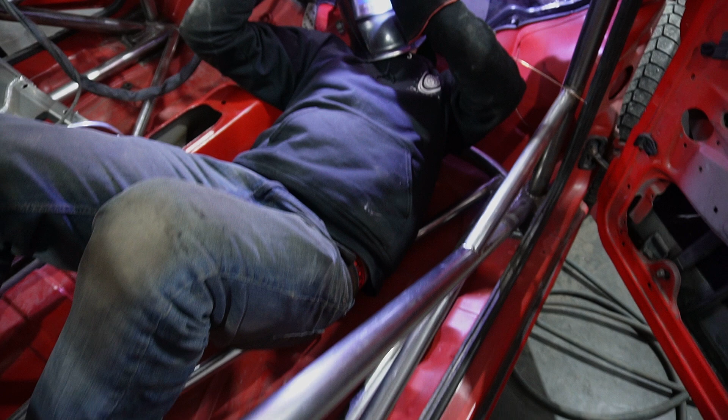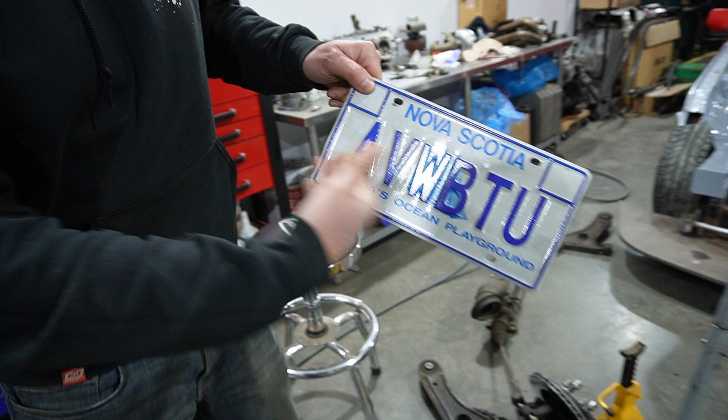Silence, that's it. Guess what that means in the comments? Who knows what that is? I know what it is. You only know because I told you. You would have never guessed that.

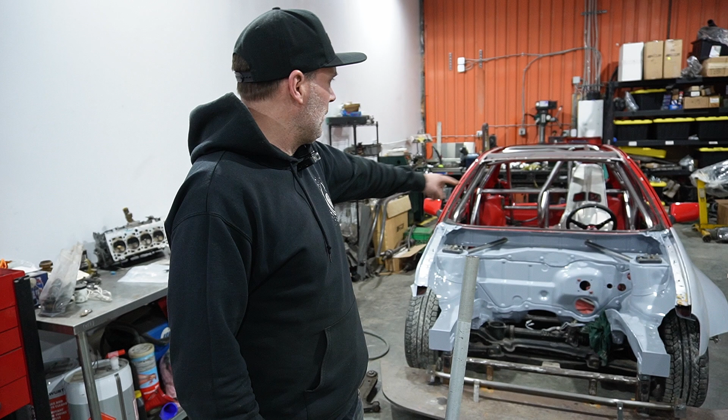Okay, we got the front bars welded in. The steering column's still zip tied up, so we got to build a steering column bracket.

You sticking your gut out? Tissue's in here. Yeah, okay.

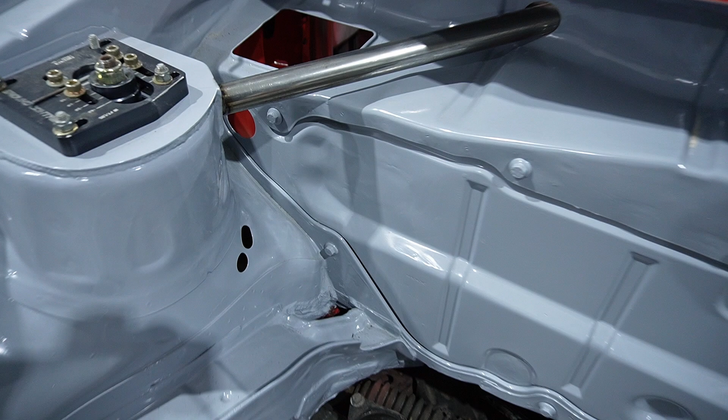So weld those in, looking good. We got those welded in. We got to build a bracket for the steering column, and we're going to just design something up quick and cut it out on the plasma. That's how Fusion works for me, really quick. Then we got to cut that out, bend it all up, get it in the car. We'll show you what we did.

Okay, before we continue, Clayton, we wanted to talk about... jazz hands. We wanted to talk about what? The hoopty. It's coming back. It's going to be amazing. Well, I wouldn't say it's coming back. No, it's coming back. It might come back, actually.

We're finally going to do the teardown of that. We're going to have an upcoming video probably within the next couple of weeks, I'd say. Your way this weekend, right? Yep. But we're going to bring it in, pull the engine out, get it all ready to do the engine teardown, and I think we're going to do the live stream as we talked about before for the engine teardown.

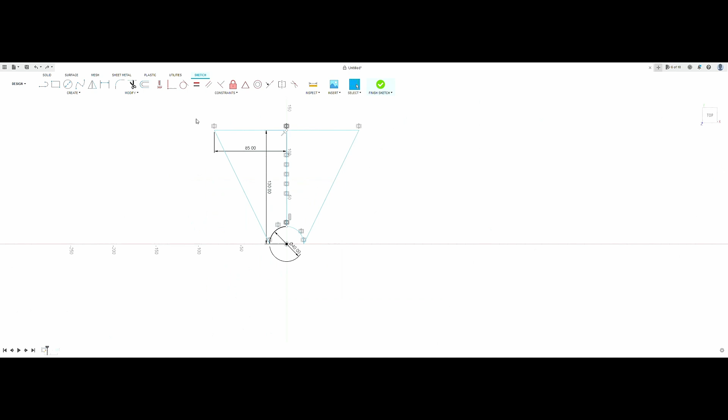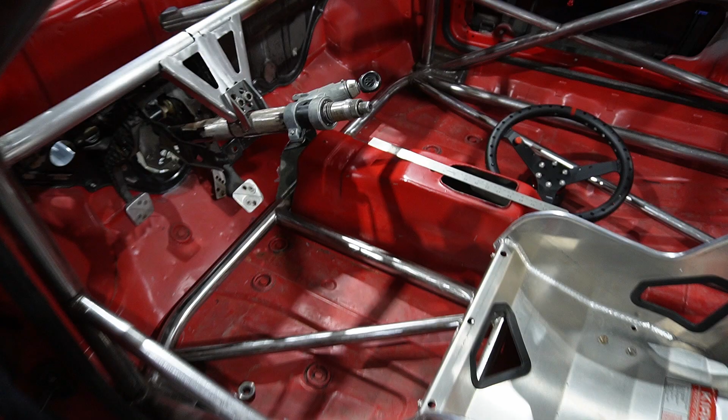Okay, we got the bracket all cut out, ready to weld on. One more thing off the list.

Still primer, Clayton. We still got a long way to go before that's looking fancy. It's not just staying primer? Not staying primer. But we did get the bars welded in, as we mentioned, and the steering column bracket's done.

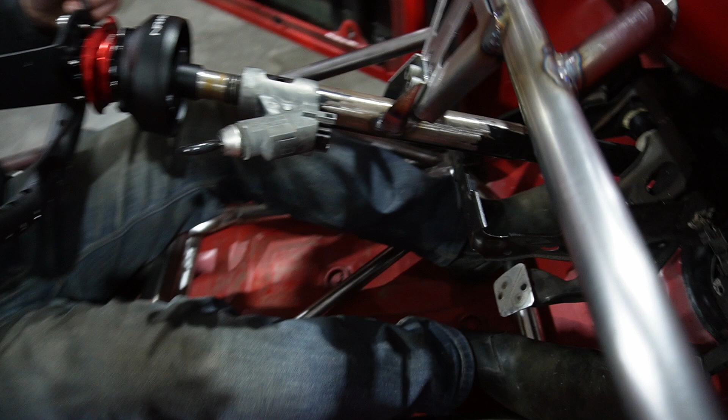I don't know if you can see that from out there, Clayton, but we drew that up, cut it on the plasma cutter. Minor headaches with that one. I think the bending was the worst part of that thing, but it came out pretty good. We got another bracket to build underneath it to give it a little bit more stability, but it's definitely better than what we had last time, especially with...

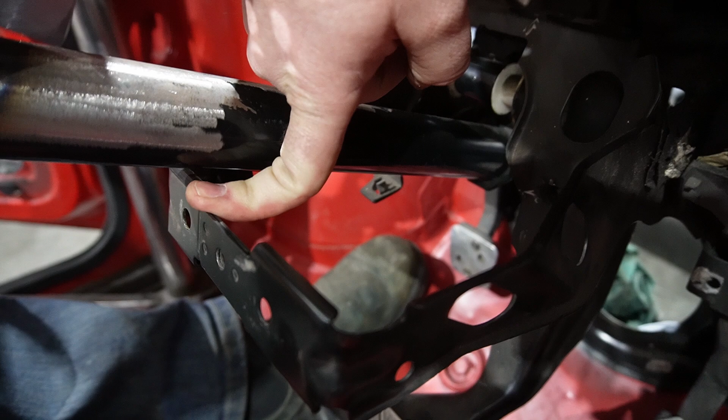Yeah, pretty much, yeah. And I got a new quick release, fancier than the last one that I had on here. Obviously none of it's bolted in yet because this is coming in and out of the car 1,000 times.

So now we got to do the back of the seat bracket. I just want some support on the back side of the seat. So we're going to build a bracket from the seat to the actual roll cage itself. Probably going to cut something out on a plasma cutter again with that.

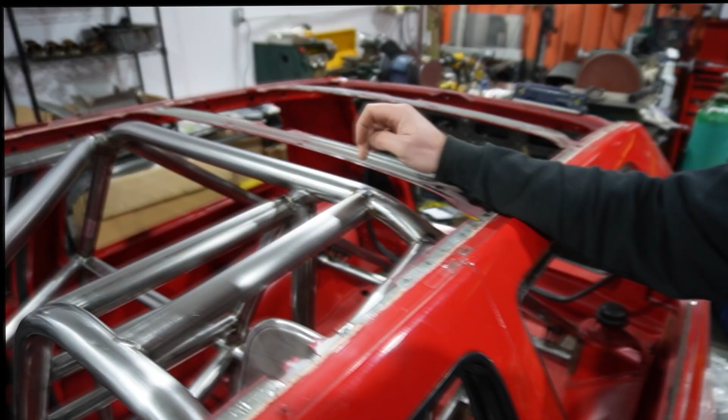So let's do it. There were some holes on the top of the cage that they didn't get to. I don't know if we talked about this or not, but I went around and welded those all up now that we can access them on both sides. So that's all done. Once we get the seat bracket done, the next step will be to paint the cage, which I already talked about. We are going to paint the cage - best time to do it now with everything taken apart.

So let's do the seat bracket, Clayton. Come on.

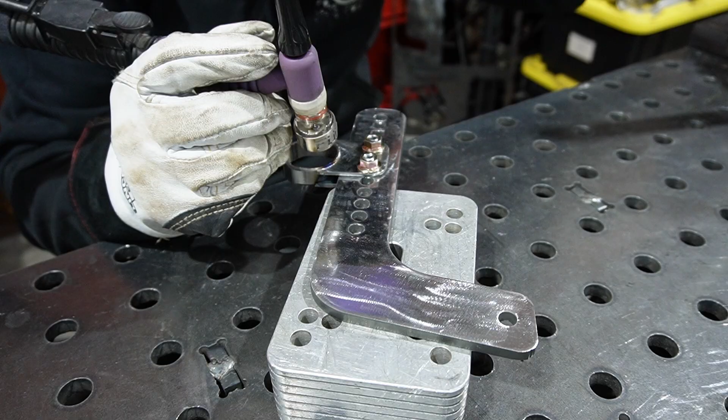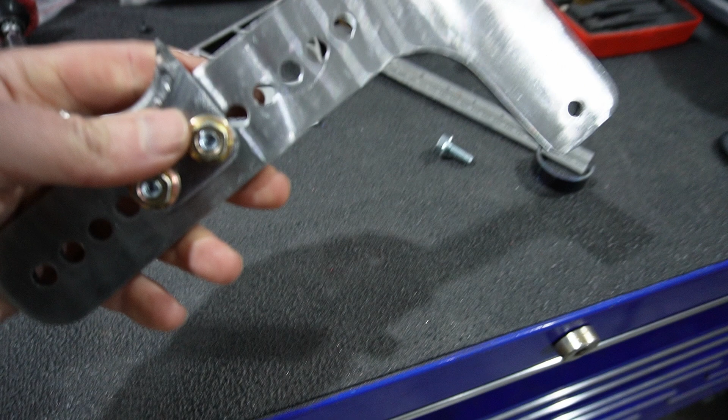Okay, next up, seat bracket. We cut this out and we got to get this tacked in. Clayton, standing around doing nothing.

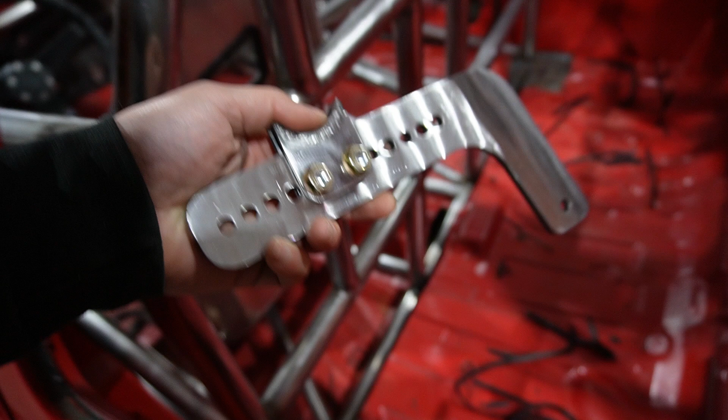Stay warm, yeah. So we're going to put this in here like so. Something like that. I don't know if you can see any of that, but you'll see it when it's all done. You got her?

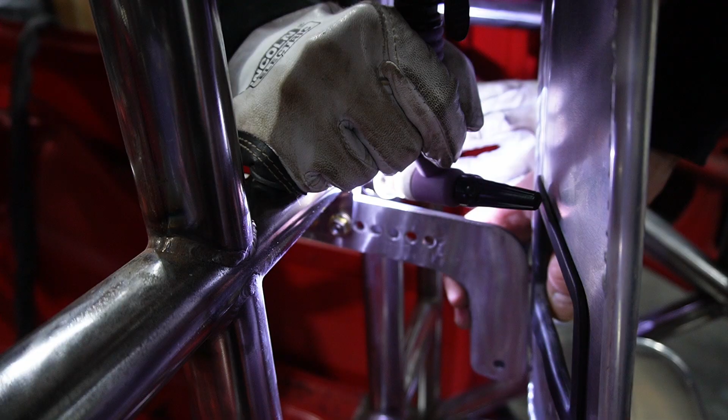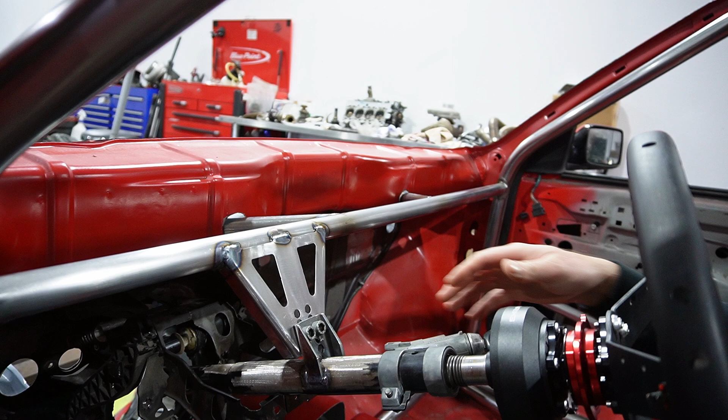Okay, next up is the cluster. I got it taped up just to protect it. I was originally going to mount this in the dash itself, but I think I want to mount it and attach it to the steering column so that if the steering column gets adjusted, it will stay the same all the time. I have a few ideas of how I want to do this. I think I'm going to do like a sheet metal, bend something up, kind of like we did on the bracket here.

I'll probably do it out of aluminum so that it can be removed. And I think I'm just going to design something up in Fusion again and cut it out on the plasma. Hopefully we can make something work.

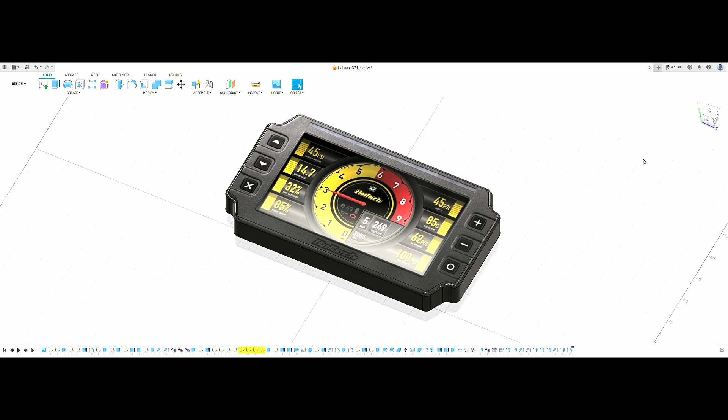All right, so I have Fusion 360 fired up and I was lucky to be able to find a 3D model of the IC-7 Haltech Dash. So this is going to make my life extremely easy because all the mounting points and everything are already here, where the connector goes, everything. So I basically just have to model something around this to fit in the car and also fit around this dash.

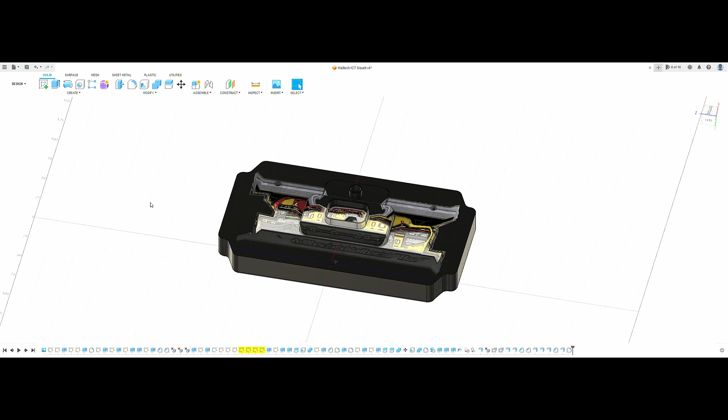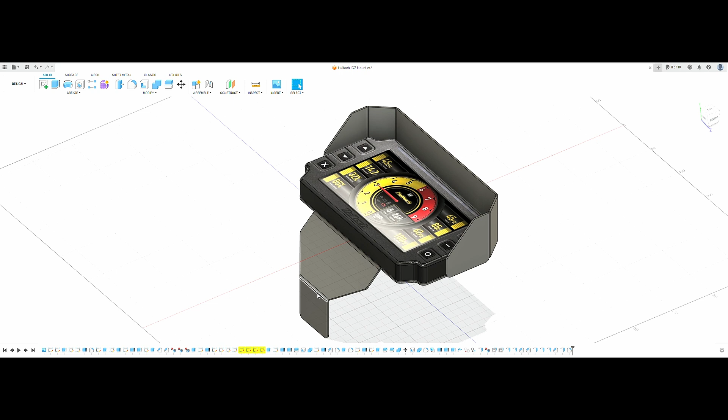So I've actually gone ahead and already done that. Let's put this back to a home position. I've already gone ahead and done that, which I'll show you now. So this gives you a good idea of what it's going to be. These measurements, all this is going to be adjusted once we take final measurements on how it's going to fit in the car. So all this will be changed as we move forward. But I basically gave it a little sunshade so that when it's in the car, it'll have a little bit better visibility. There are LEDs all up along here.

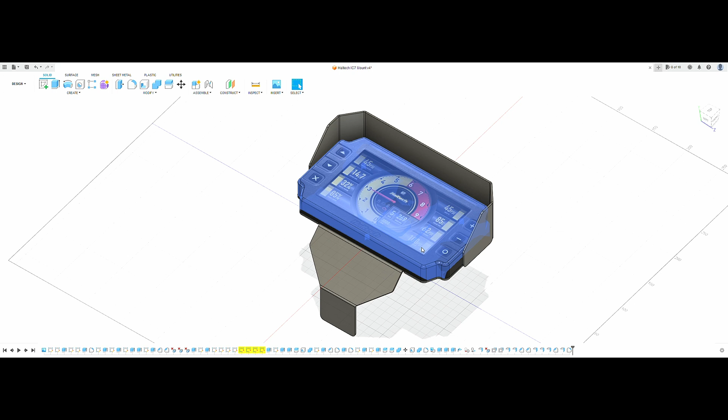Also on the sides, I've cut them a little bit short because these are basically a yes and no kind of push button. Obviously there's other buttons there as well, but typically if you need to enter anything, you're going to press the X or the O on the side. So I want to be able to fit my gloves in there and be able to hit those buttons fairly easily. And then the side angles of how it's all going to mount in, those are going to be adjusted as we take some measurements for it. So that's going to be easy to bend up.

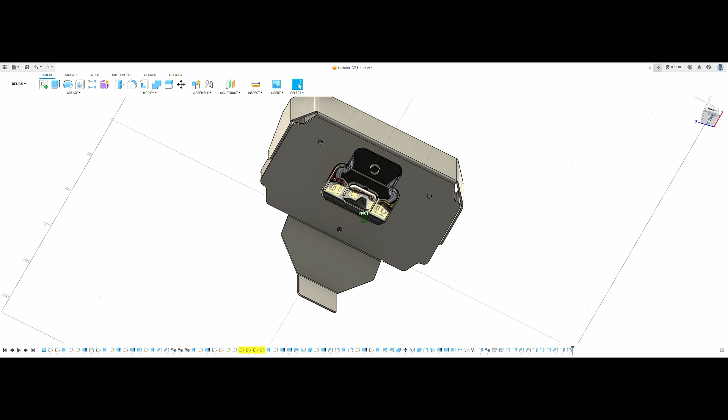And we're ready now to basically get the G-code for this so that the CNC machine can understand it. And we'll cut it out of the plasma and start bending it up. Hopefully all goes as planned with this thing.

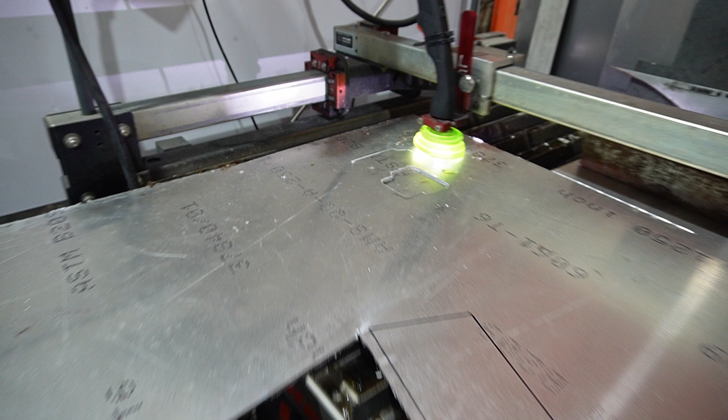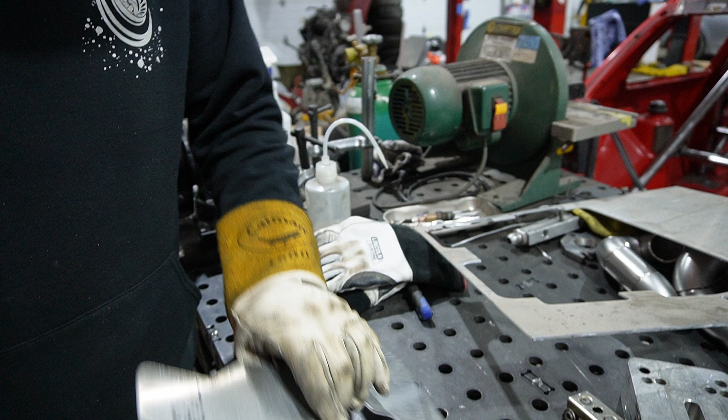She's thick, but it's what we had. So let's see if we can bend it up and make something out of it.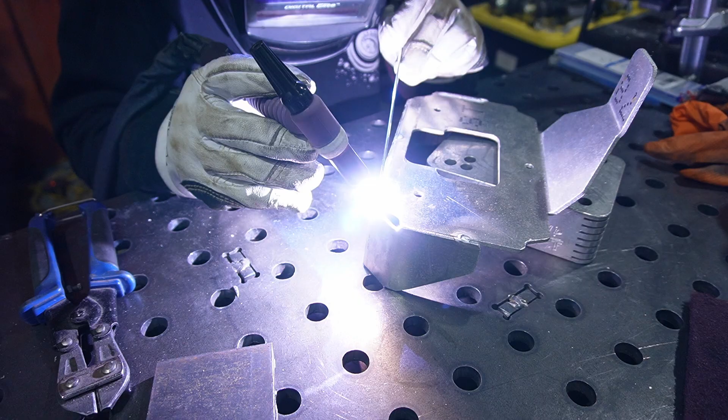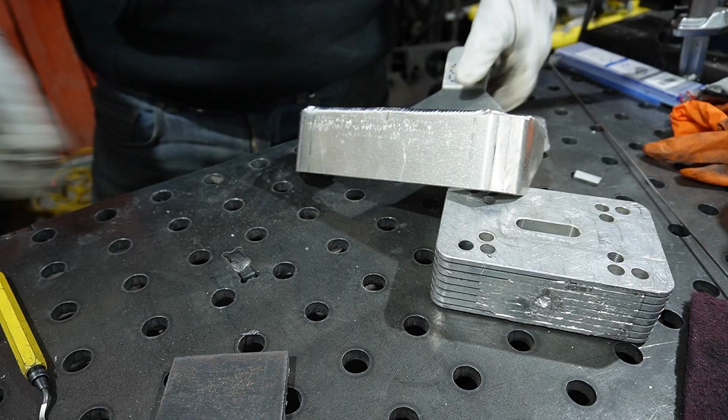Okay, there we have it, tacked up. Probably going to paint it, I think, black, crinkle coat, I don't know, flat black, something, not shiny.

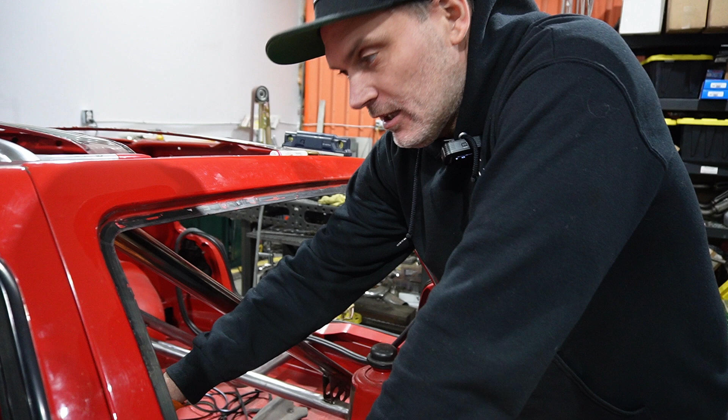Clayton, we got the seat mounted nice and sturdy now. As you can see, we cut that out with plasma. I got this all tacked, welded in now, for good, welded on the back of the seat. Also, I don't think we filmed any of welding that on the seat. No. It is in very nice and solid. It's adjustable, and look at this fancy thing here, Clayton. That's nice. Let me go on the other side.

Well, I got that B-roll all of it. We got that all cut out on the plasma and bent up. We did try to bend it, and this specific grade of aluminum isn't great for bending, so it ended up cracking. Yeah, a little thick too, so. No, I don't mind the thickness now. I've foreseen bending it though. Yeah, for bending it. And anyways, we had to weld the backside of it.

Whatever, we're going to probably just crinkle coat that. Crinkle coat it. It's going to be black anyway, so it's not going to stay silver. So basically the rest of the stuff that needs to be welded to the cage and everything is completed. We're now going to sand it all down, get it ready to paint it, which is going to be a pain because there's going to be a lot of taping and a lot of sanding. The sanding won't go too bad because Robbie's got most cleaned up already. But there was a couple other things we want to talk about, right, Clayton?

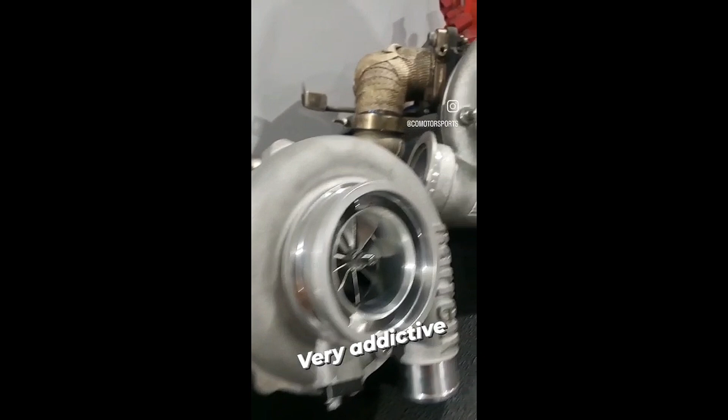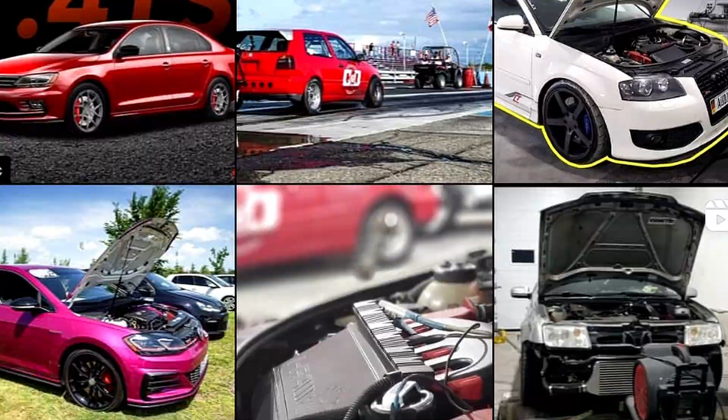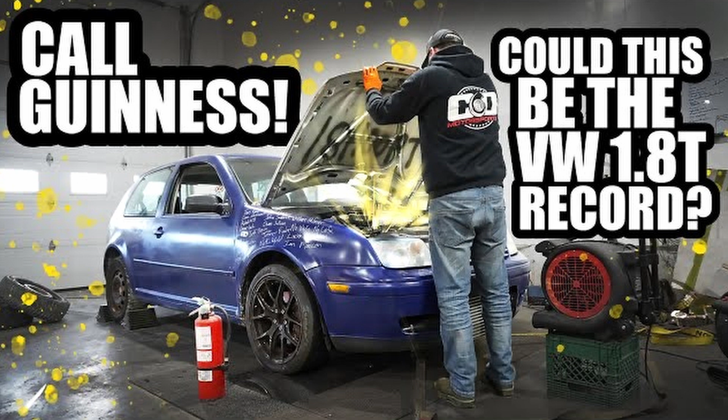And what else do we want to talk about? Was there anything else? No, we got the hoopty, we talked about that earlier. So remember, that's coming back. First video is going to be just bringing it in, taking the engine out. Then we're going to do the live teardown. So that's that, and it might get another engine. We don't know, we might try to do another version of the hoopty. It's still up in the air, but we're working on it. And today I got the pistons back for the engine, so we'll have the engine video coming up very soon as well for this specific thing.